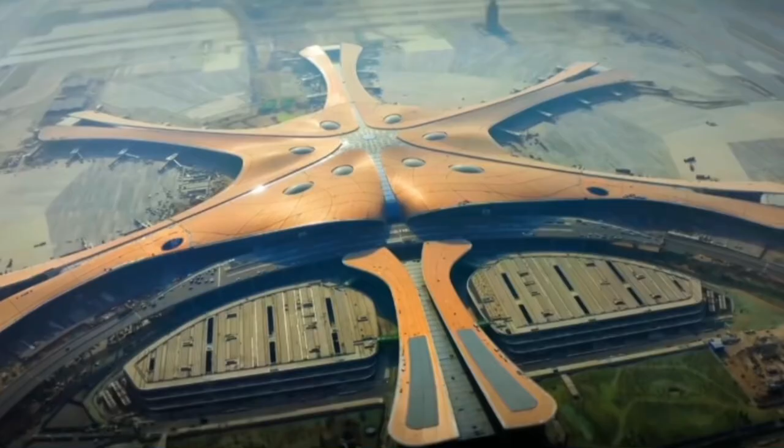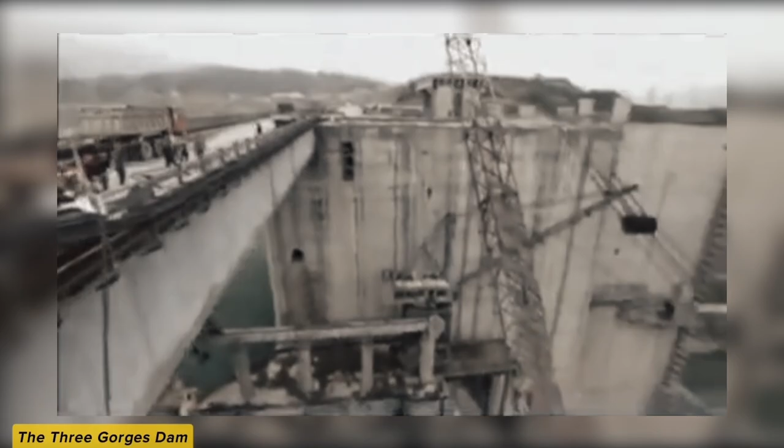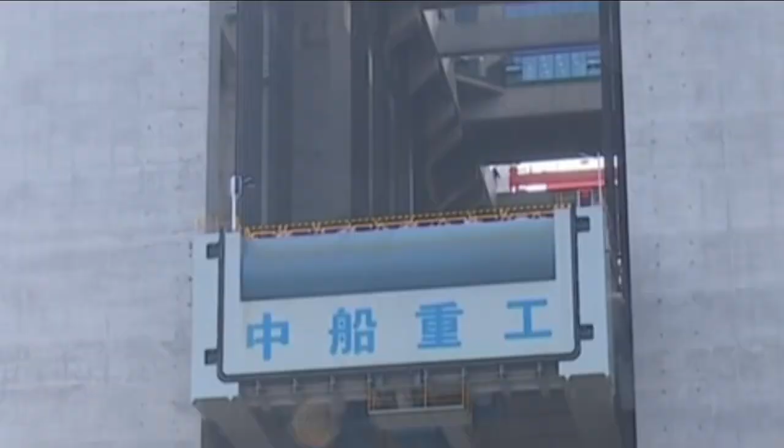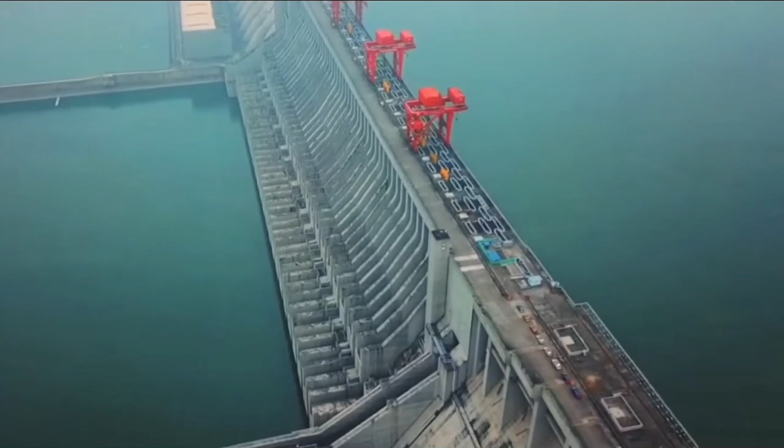China, a nation celebrated for its engineering marvels, has achieved what once seemed impossible: moving ships over mountains. This extraordinary feat, which combines ancient ingenuity with cutting-edge technology, stands as a testament to human innovation and determination. From the Grand Canal, the world's longest artificial waterway, to the Three Gorges Ship Lift, the largest and most powerful ship lift on the planet, China has mastered the art of overcoming geographical barriers to revolutionize trade, transportation, and economic growth.

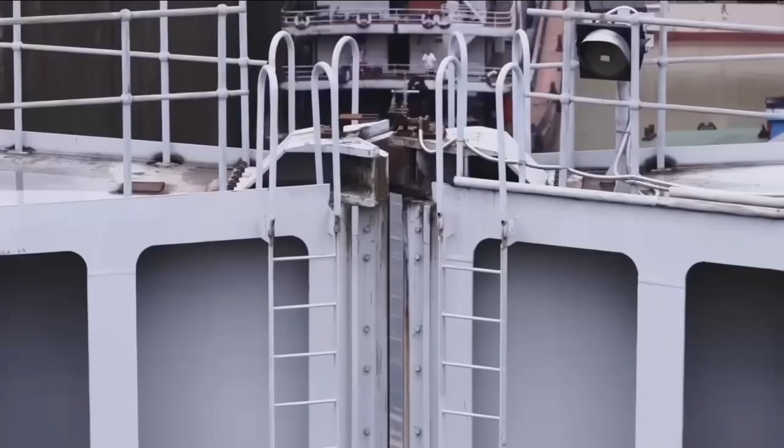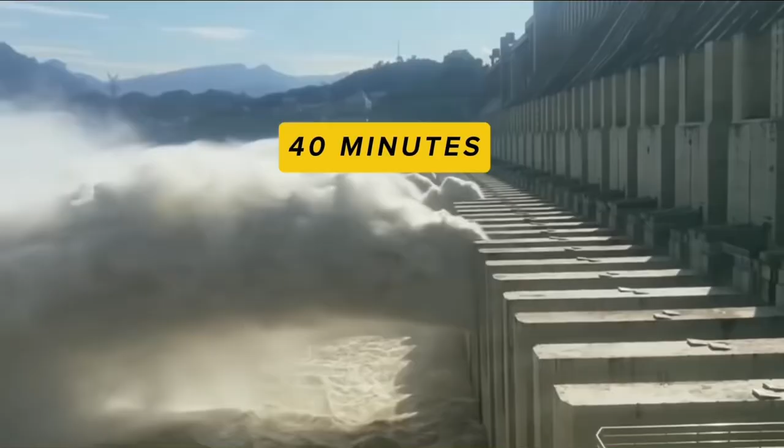In this video, we'll take a deep dive into the history, engineering, and significance of these incredible systems. Discover how the ancient lock systems of the Grand Canal, built over 2,000 years ago, allowed ships to climb hills and traverse mountains, laying the groundwork for modern ship-lifting technologies, and how the Three Gorges Ship Lift, a modern engineering masterpiece, lifts vessels weighing up to 3,000 tons over 120 meters in just 40 minutes, while bypassing one of the largest dams in the world.

China's geography is both a blessing and a challenge. The country is home to some of the world's most extensive river systems, including the Yangtze River and the Yellow River, which have been vital for trade and transportation for thousands of years. These rivers served as the lifeblood of ancient Chinese civilization, enabling the movement of goods like grain, silk, and tea across vast distances. The Yangtze, in particular, is the third longest river in the world, stretching over 6,300 kilometers and connecting the fertile plains of the east to the rugged mountains of the west.

However, these waterways are often interrupted by towering mountain ranges, deep gorges, and other natural obstacles. For centuries, these barriers created a unique problem: how do you keep ships moving when there's a literal mountain in the way?

Imagine a ship carrying tons of grain or silk, sailing smoothly along the Yangtze, only to come to a sudden halt at the foot of a massive cliff. The journey couldn't end there. Goods still needed to reach their destination.

The solution, at least initially, was as cumbersome as it was inefficient. Ships would have to stop, unload their cargo, and transport it overland using carts, animals, or human labor. Once on the other side, the cargo would be reloaded onto another ship to continue its journey. This process was not only time-consuming and labor-intensive, but also incredibly costly.

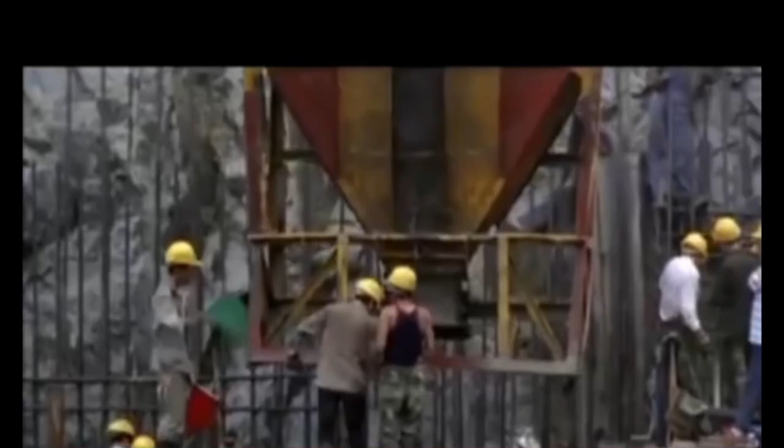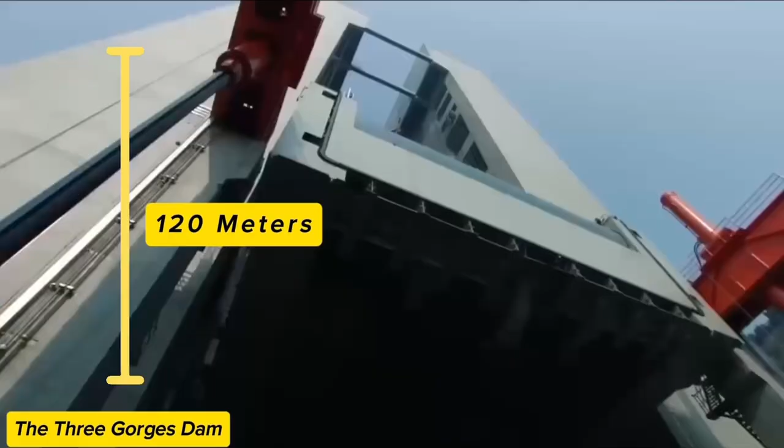It slowed trade, limited economic growth, and left merchants and traders frustrated. But where there's a challenge, there's innovation. Chinese engineers, both ancient and modern, have devised ingenious solutions to overcome these natural barriers. From the Grand Canal, an ancient marvel that used lock systems to move ships over hills, to the Three Gorges Ship Lift, a modern engineering feat that lifts massive vessels over 120 meters in the air, China has mastered the art of moving ships over mountains.

These solutions are more than just technical achievements. They are testaments to human ingenuity and the relentless pursuit of progress.

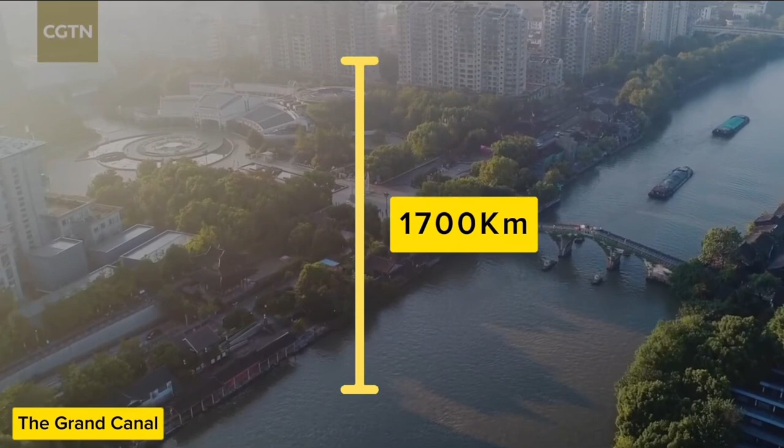The Grand Canal, the longest artificial waterway in the world, is one of China's most remarkable achievements. Stretching over 1,700 kilometers, it connects the Yellow River in the north to the Yangtze River in the south, passing through mountains, valleys, and plains. This monumental project, often referred to as the Beijing-Hangzhou Grand Canal, is not just a feat of engineering, but also a testament to China's long history of innovation and ambition.

Construction of the Grand Canal began as early as the 5th century BCE, during the Warring States period, when various Chinese states sought to improve transportation and trade. However, it was during the Sui dynasty that the canal was expanded and connected into a unified system. The Sui emperors, particularly Emperor Yang, envisioned the canal as a way to consolidate their empire, facilitate trade, and transport grain from the fertile south to the arid north. The project was massive in scale, involving millions of laborers and decades of work.

The Grand Canal was more than just a waterway. It was a lifeline for the Chinese economy.

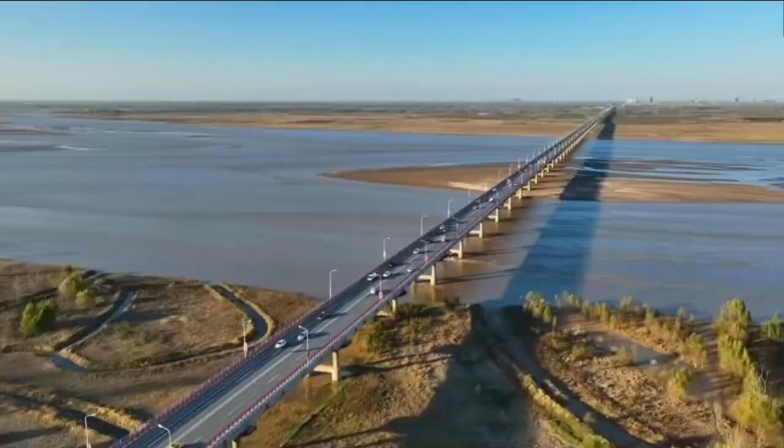By linking the agricultural heartlands of the south with the political and military centers of the north, it enabled the efficient movement of goods, people, and ideas. Grain, silk, tea, and other commodities flowed along the canal, supporting the growth of cities and the stability of the empire. It also played a crucial role in cultural exchange, as merchants, scholars, and travelers used the canal to traverse the country.

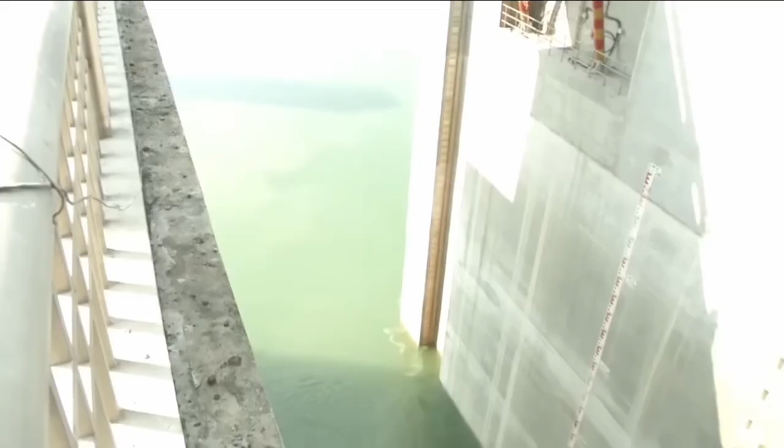Over the centuries, the canal was continuously maintained and improved by successive dynasties, including the Tang, Song, and Ming. Each era brought new innovations, such as improved lock systems and reinforced embankments, ensuring the canal remained functional despite natural wear and tear. Today, the Grand Canal stands as a symbol of China's enduring legacy of engineering and innovation.

While modern transportation methods have reduced its economic importance, sections of the canal are still in use, and its historical significance is recognized globally. In 2014, it was designated a UNESCO World Heritage Site, cementing its place as one of humanity's greatest achievements.

In the next chapter, we'll explore how the Grand Canal's ancient lock systems laid the groundwork for modern ship-lifting technologies, paving the way for even more ambitious projects like the Three Gorges Dam Ship Lift.

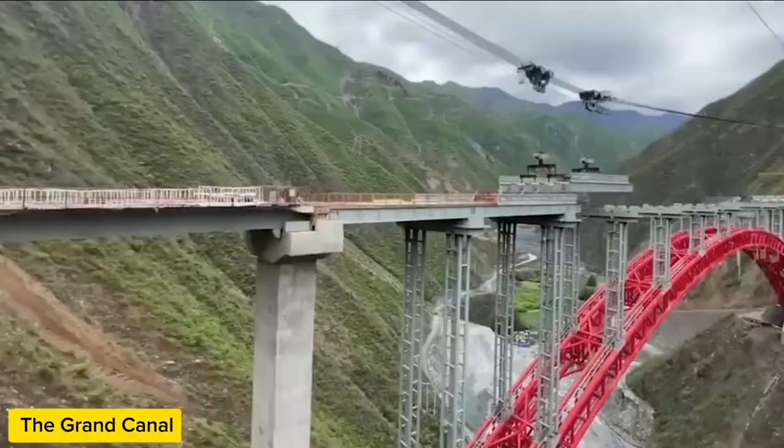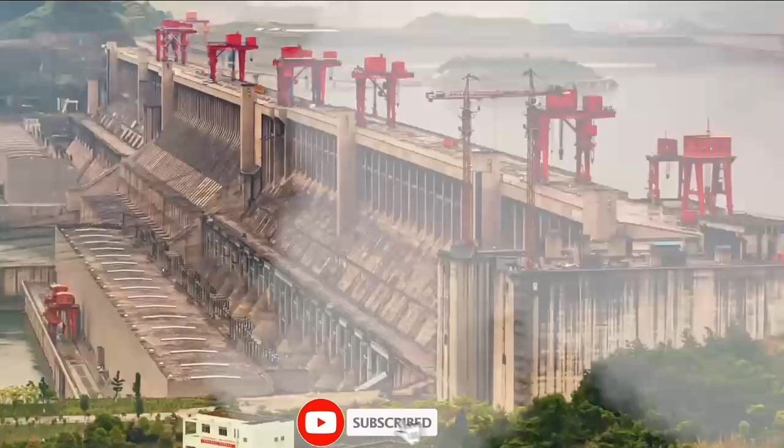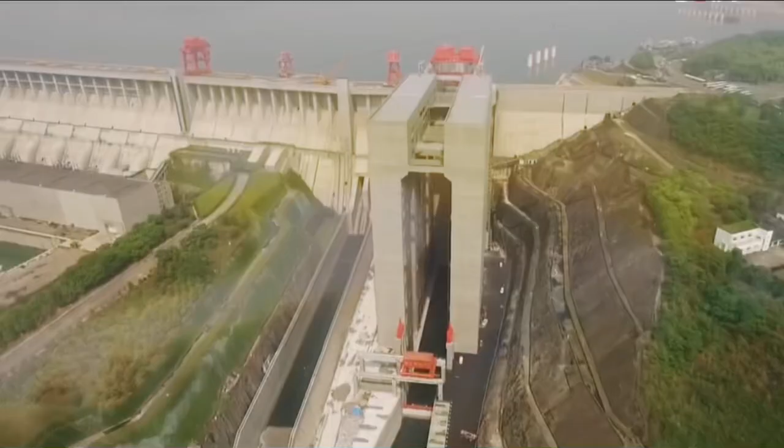While the Grand Canal was a groundbreaking achievement, it was limited by the technology of its time. Fast forward to the 21st century, and China has taken ship transportation to new heights, literally, with the Three Gorges Dam Ship Lift. This modern engineering marvel represents the next leap in overcoming geographical barriers, combining cutting-edge technology with the lessons learned from centuries of canal engineering.

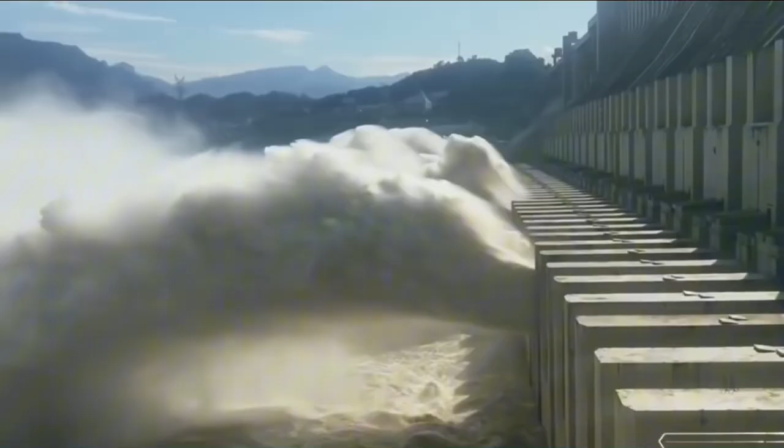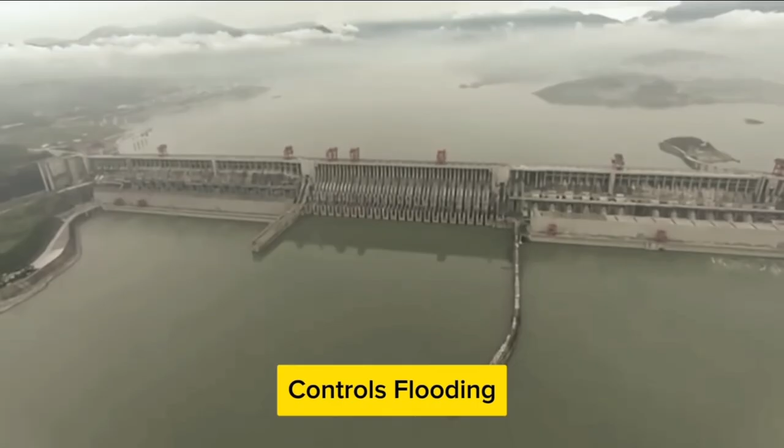The Three Gorges Dam, located on the Yangtze River in Hubei province, is the largest hydroelectric power station in the world. Completed in 2012, the dam is a symbol of China's modernization and engineering prowess. It generates clean energy, controls flooding, and improves navigation along the Yangtze River, one of the busiest and most important waterways in the world. However, the dam's massive structure created a new challenge: how to allow ships to bypass the dam and continue their journey upstream or downstream.

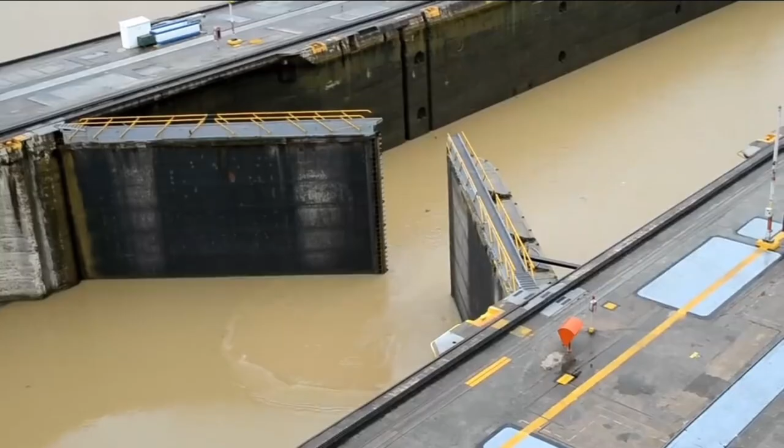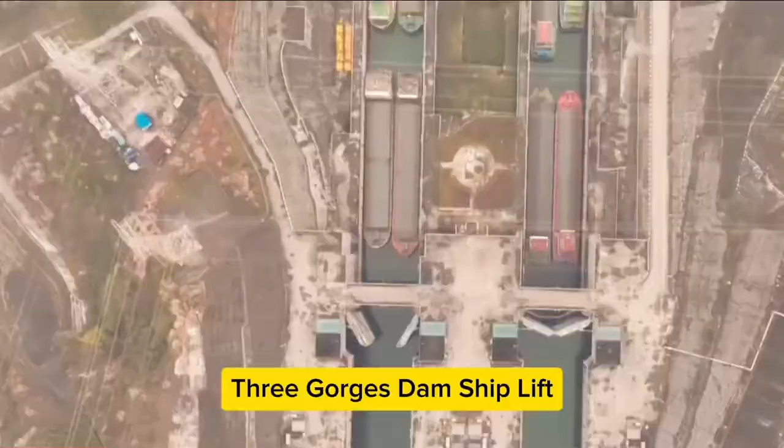Traditional lock systems, while effective, were too slow and inefficient for the volume of traffic on the Yangtze River. With thousands of ships carrying millions of tons of cargo each year, a faster and more efficient solution was needed. Enter the Three Gorges Dam Ship Lift, the largest and most powerful ship lift in the world.

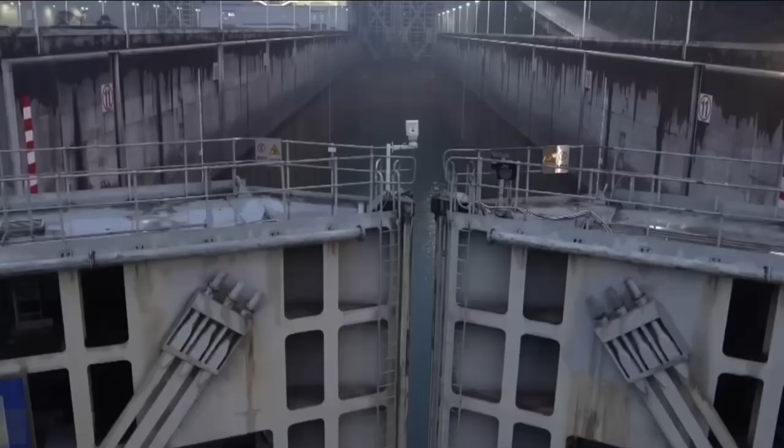Standing at 120 meters tall, this engineering masterpiece can move vessels weighing up to 3,000 tons over the dam in just 40 minutes. To put that into perspective, traditional lock systems could take up to 4 hours to complete the same process. The ship lift operates like a giant elevator for ships.

Here's how it works. First, a ship enters a massive water-filled chamber at the base of the dam. Second, the chamber is sealed, and a system of counterweights and cables lifts it to the top of the dam. Third, once at the top, the chamber is unsealed, and the ship continues its journey.

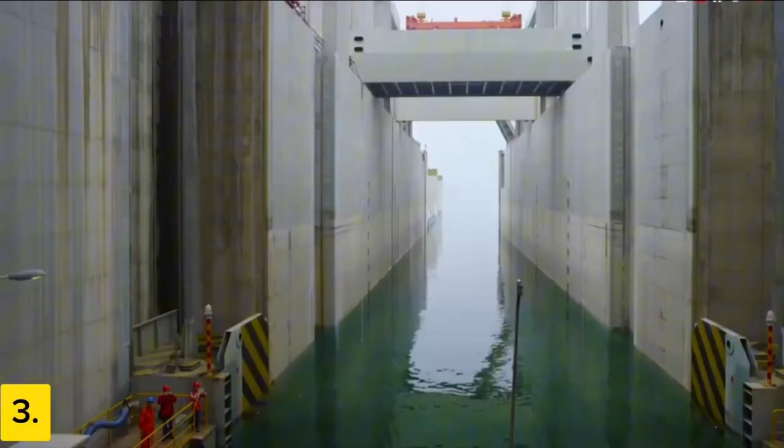This system is not only faster, but also more energy efficient, using less power than traditional lock systems. It's a perfect example of how modern engineering can build on ancient principles to solve contemporary challenges.

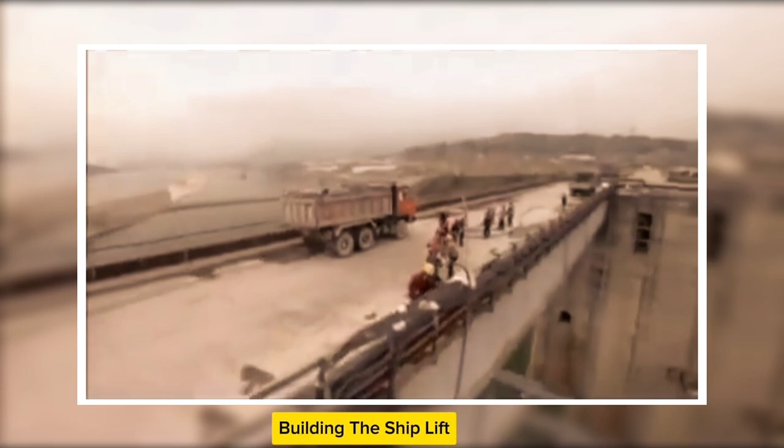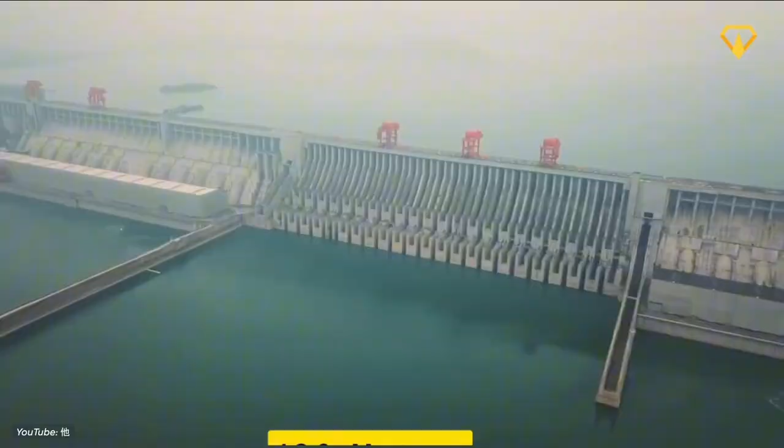Building the Three Gorges Dam Ship Lift was no small feat. Engineers faced numerous challenges, each requiring innovative solutions. The sheer size of the structure was daunting. Standing at 120 meters tall, it had to accommodate ships weighing up to 3,000 tons.

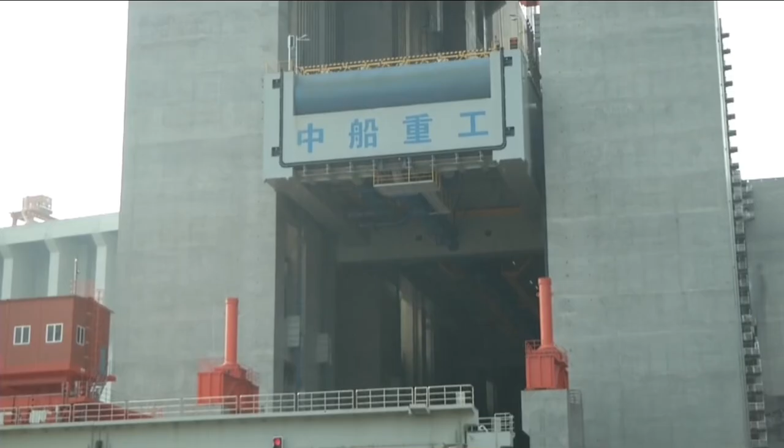Additionally, the dam is located in an earthquake-prone region, meaning the ship lift had to be designed to withstand seismic activity. Precision was also critical, as even the slightest miscalculation could lead to catastrophic failures when moving such massive loads.

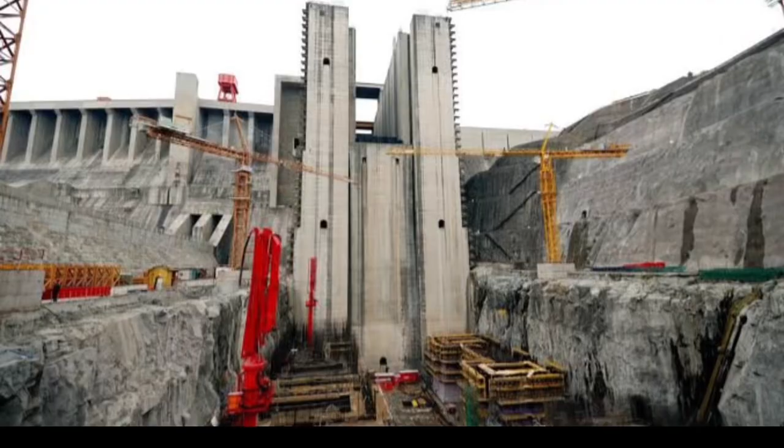To address these challenges, engineers turned to advanced materials, cutting-edge technology, and meticulous planning. They used high-strength steel and reinforced concrete to ensure the structure's durability and stability. Computer simulations played a crucial role in testing the design under various conditions, from extreme weather to potential earthquakes.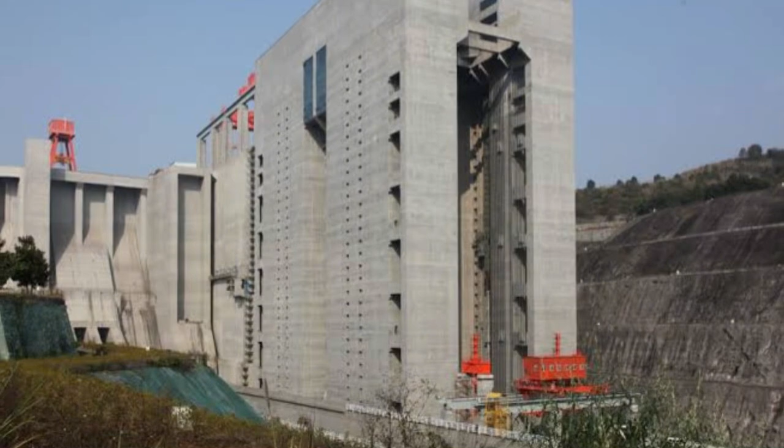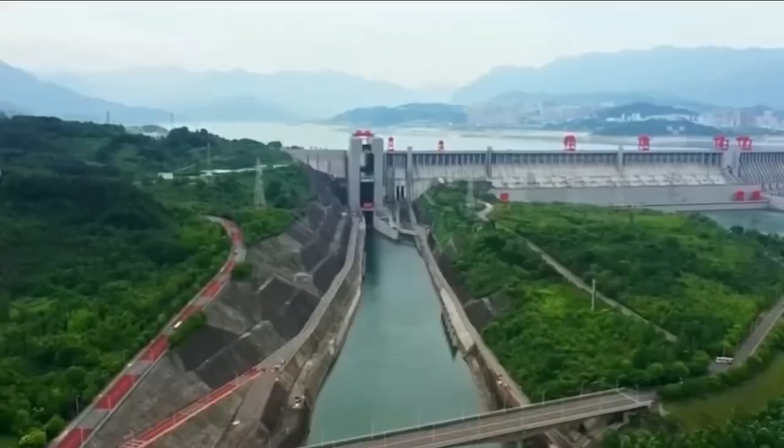One of the most ingenious features of the ship lift is its sophisticated counterweight system. The counterweights balance the weight of the water-filled chamber, significantly reducing the energy required to lift it. This not only makes the system more efficient, but also ensures smooth and stable operation, even when handling the heaviest vessels. The ability to move ships over mountains has had a profound impact on China's economy and transportation network.

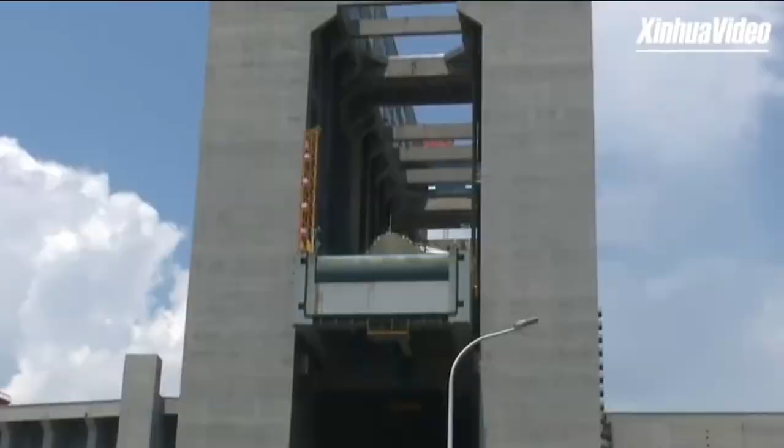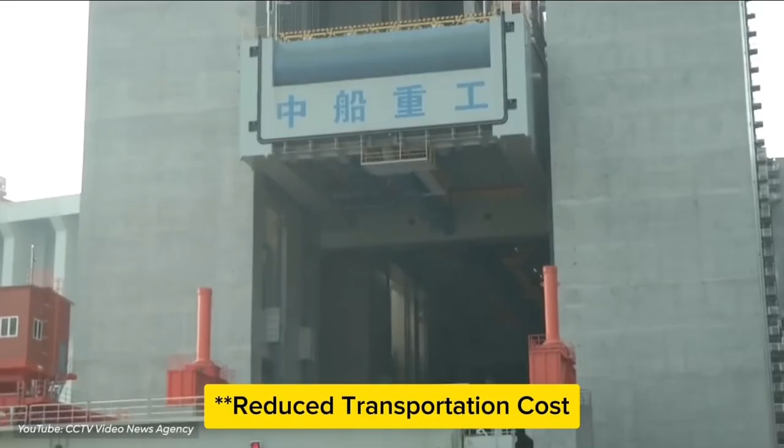The Three Gorges Dam Ship Lift has revolutionized transportation on the Yangtze River, one of the busiest waterways in the world. By enabling ships to bypass the dam quickly and efficiently, the ship lift has reduced transportation costs. Faster transit times mean lower fuel consumption and operational expenses.

It increases the volume of goods transported. The ship lift can handle more ships in less time, boosting cargo capacity. This has boosted trade and economic growth. Efficient transportation supports industries and businesses along the river, driving regional development.

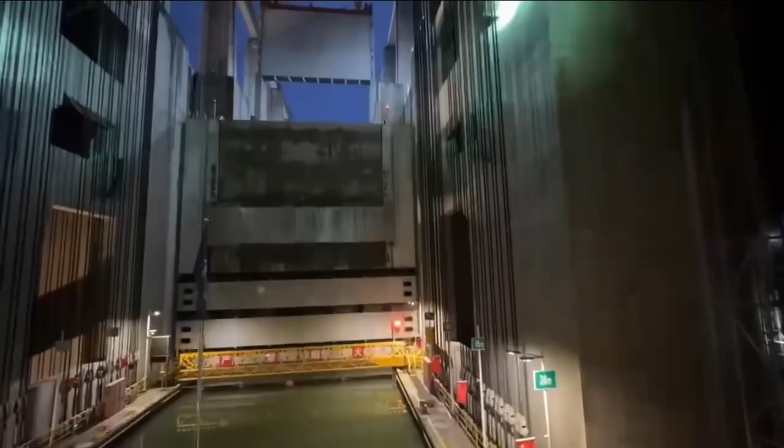The Yangtze River is a vital artery for China's economy, carrying millions of tons of cargo each year. The ship lift ensures that this critical waterway remains open and efficient, supporting China's continued development. It's a testament to how engineering innovation can transform challenges into opportunities, shaping the future of transportation and trade.

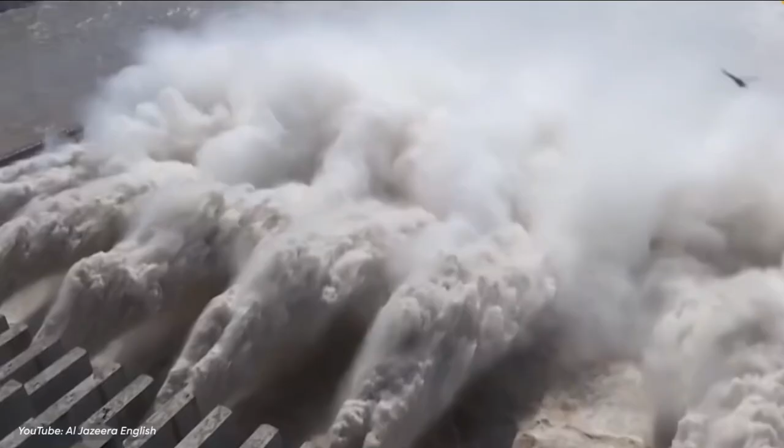The Three Gorges Dam has faced significant criticism for its environmental and social impacts. The construction of the dam, one of the largest infrastructure projects in history, displaced over 1 million people, forcing communities to relocate and adapt to new environments. This mass displacement sparked debates about the social costs of such megaprojects.

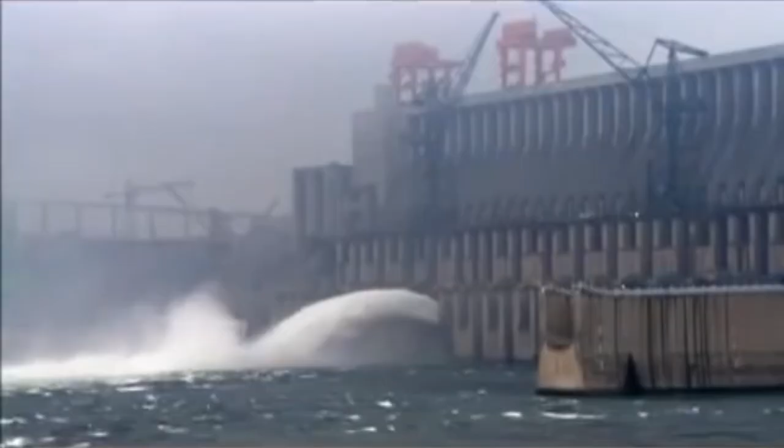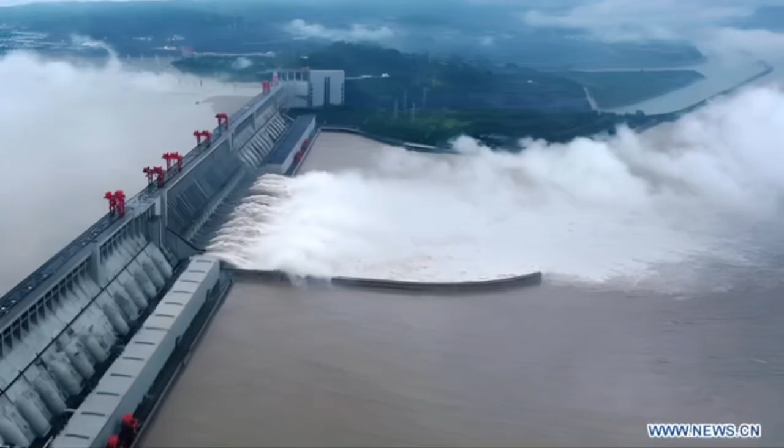Ecologically, the dam has caused profound changes to the Yangtze River's ecosystem. The reservoir created by the dam submerged vast areas of land, leading to the loss of habitats for plants and animals. Additionally, the dam disrupted fish migration patterns, threatening the survival of species like the critically endangered Chinese paddlefish. These environmental impacts have raised concerns about the long-term health of the Yangtze River's biodiversity.

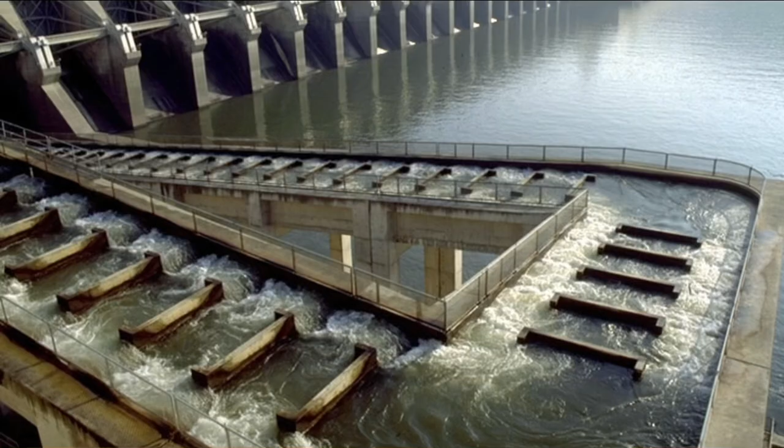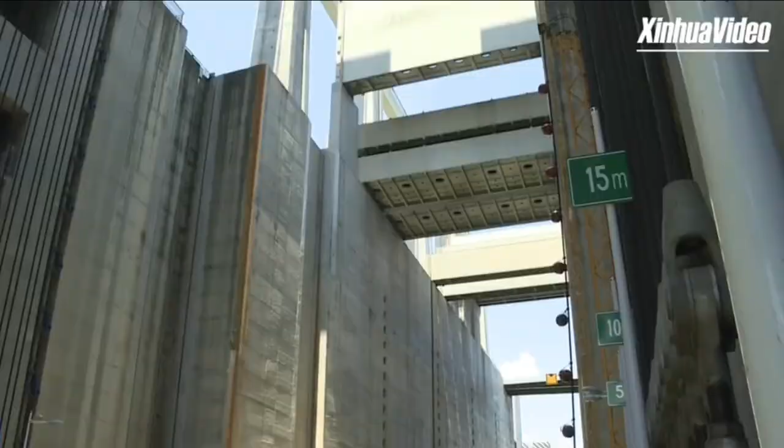However, the Chinese government has taken steps to mitigate these effects. Reforestation programs have been implemented to restore vegetation and reduce soil erosion around the reservoir. Fish ladders and other fish passage systems have been introduced to help migratory species navigate the dam. Efforts have also been made to improve the living conditions of displaced communities, including the construction of new towns and infrastructure. The Three Gorges Dam Ship Lift itself is relatively environmentally friendly.

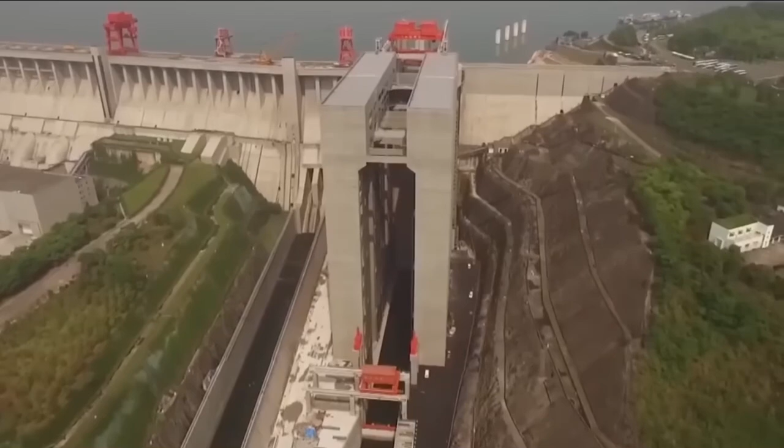It uses less energy than traditional lock systems and helps reduce greenhouse gas emissions by making river transportation more efficient. By enabling ships to bypass the dam quickly, it minimizes fuel consumption and supports sustainable trade along the Yangtze River.

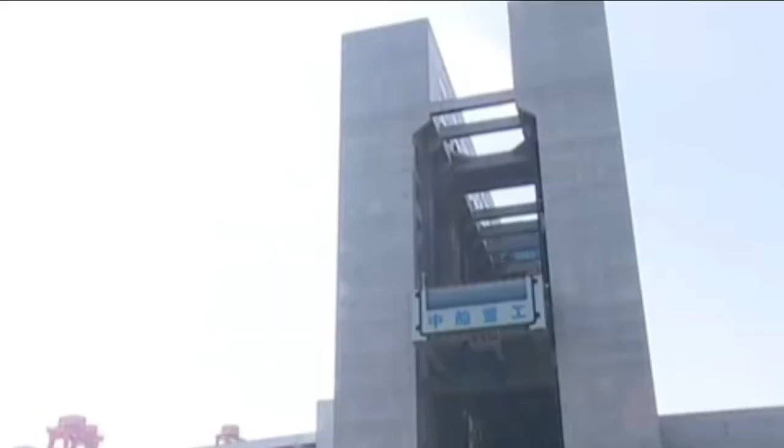From the ancient Grand Canal to the modern Three Gorges Dam Ship Lift, China's ability to move ships over mountains is a testament to human ingenuity and determination. These engineering marvels have not only transformed transportation, but also shaped the course of history, enabling trade, economic growth, and cultural exchange. As China continues to innovate, the world can only imagine what incredible feats it will achieve next.

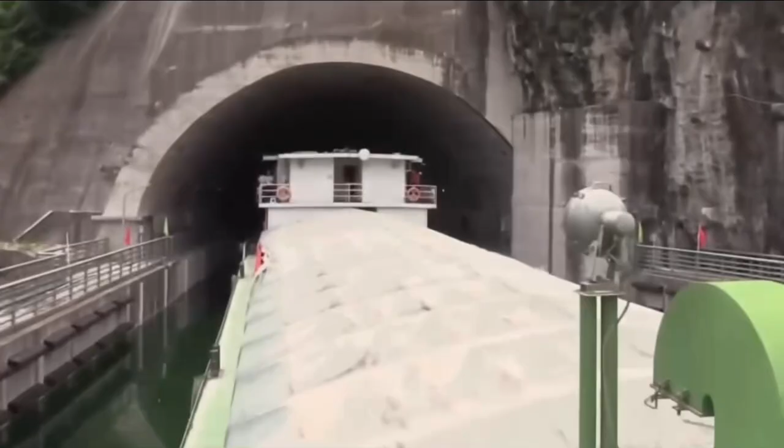Whether through ancient canals or futuristic ship lifts, one thing is clear: when it comes to overcoming obstacles, China has always been ahead of the curve. These projects remind us that with creativity and perseverance, even the most daunting challenges can be conquered.